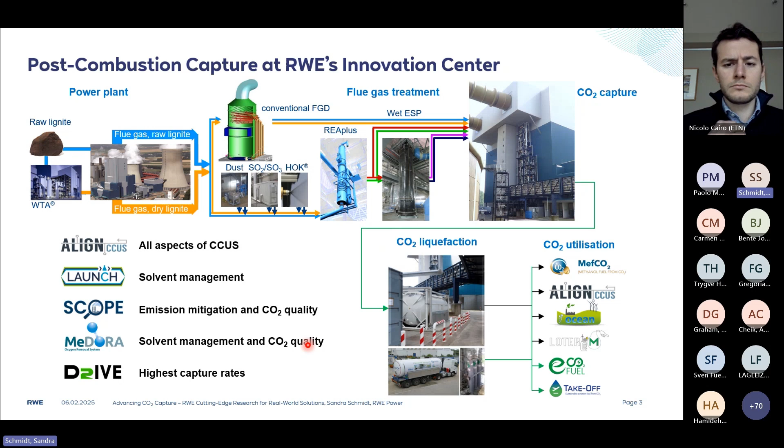The CO2 scrubbing pilot plant in Niederaussem is designed as an all-rounder. This means that it can deal with both fast and very slow reacting solvents, which can have a high or a low CO2 load capacity, and which can behave very differently regarding emissions and degradation behavior. Various process steps can be bypassed so that an optimized operation mode can be configured for several boundary conditions.

With a CO2 production capacity of 7.2 tons of CO2 per day at 90% capture rate, the plant is large enough to deliver suitable process data for simulations or scale-ups to large plants. And at the same time, it is small enough to avoid needless high costs for operating and equipment. The process is equipped with online measurement technology to evaluate the process performance, but also to test the measurement technology itself.

The parts of the plant marked in green are the emission reduction technologies, like the FGD, so the flue gas desulfurization unit with a wet electrostatic precipitator, the aerosol test module, the flue gas conditioning system, the dry bed here in the absorber, the water wash section, and the acid wash section. This all is used for emission reduction tests.

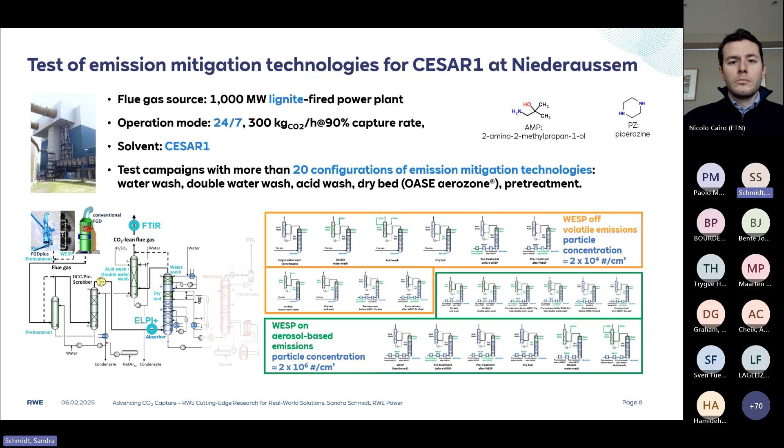For CESAR1, a simple water wash is not sufficient to achieve the desired low emission values. Nevertheless, tests with only the water wash are important to investigate the effects of process parameters on the emissions, such as the capture rate or the flue gas composition.

Emissions actually fall at lower CO2 levels, which is due to the temperature effects in the absorber. When less CO2 is available, less reaction heat is released, which lowers the temperature in the absorber, and in this way, it lowers the emissions.

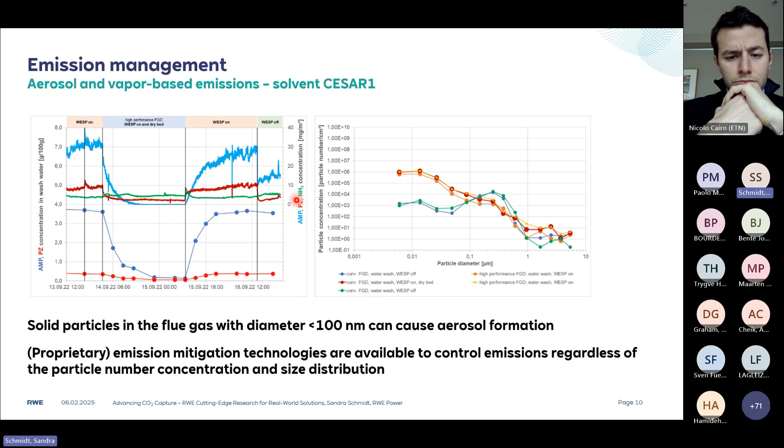Depending on the application, the dynamic or start-stop behavior of the CO2 capture process in interaction with the flue gas source is important. This applies not only to the CO2 capture rate and the heat demand, but also to the emissions. To date, it has not been possible to simulate such processes with sufficient accuracy. Real data from pilot plant tests, therefore, are the best basis for predicting plant behavior for industrial applications.

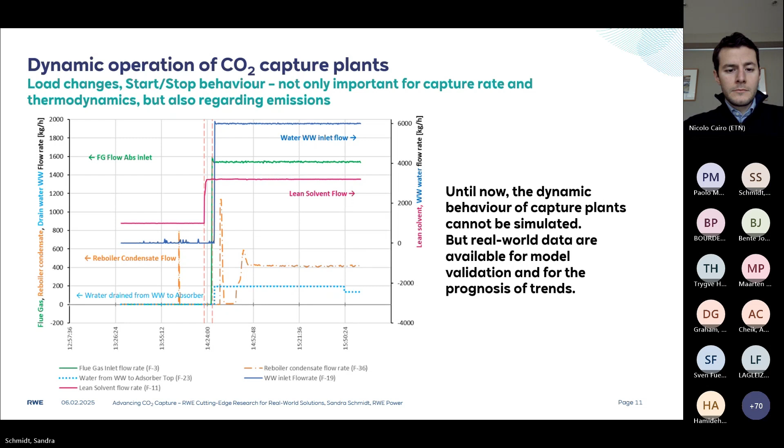As can be seen here from the operation data of the CO2 capture plant in Niederaussem, the operating parameters stabilize within a few minutes. The results and experience gained from the 15 years of operation of the CO2 capture plant at the Innovation Center in Niederaussem are being used. They will flow directly into the CO2 capture project currently being developed by RWE Power at the Knappsacker Hügel.

An optimized solvent and process technology will be used at the Knappsacker Hügel, which offers clear advantages based on the experience gained in Niederaussem. Optimized processes with a stable and highly efficient solvent have the advantages that less steam is required to regenerate the solvent, and that waste streams and emissions are significantly reduced. In addition, the optimized emission reduction technology is used so that a maximum reduction of emissions can be achieved with minimum effort. We plan to submit the permitting documents for this plant in about a year.

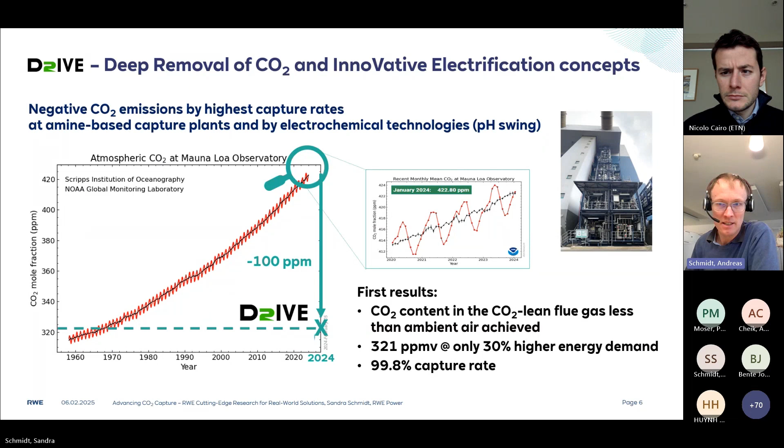TNO. And regarding the gradient that you need to push the oxygen out of the solvent, you will have the sweep gas. So this could be nitrogen or even CO2. And then perhaps a light vacuum will be tested, so a little bit of under pressure. What's the optimum? We will find out. So there are 18 months of testing planned for the technology. And as Sandra has pointed out, we need long-term testing.

CESAR1 is a low degrading solvent. It mimics, we think, also the modern world of new commercial solvents. And then you need time to find out what the effects are. And in the laboratory, you see the numbers. This was reached with this setup. And we will do it with 100% of the solvent flow in the pilot plant. But this equipment is still in construction, so not implemented in the process until now.

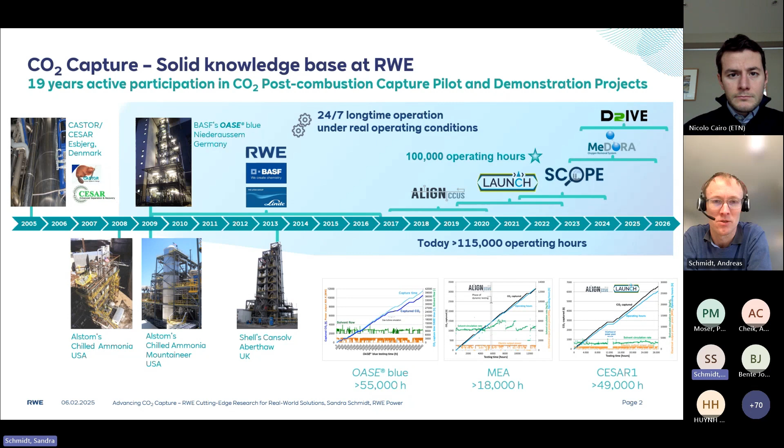So the project works with under pressure, not with over pressure. That is very interesting. Yeah, under pressure on the gas side, in the membrane. So you have the normal pressure of the solvent from the outside, and then under pressure in the sweep gas. Yeah.

Very cool. It might be mid-year that it will be presented at the Trondheim conference, if you're interested. Because it's not just tested at RWE, it will also be tested at a waste-to-energy plant in the Netherlands, from HVC, and there we will find out what we will achieve. Yeah. Also the aging of this membrane when it comes to one year of operation and so on. Yeah, very interesting.

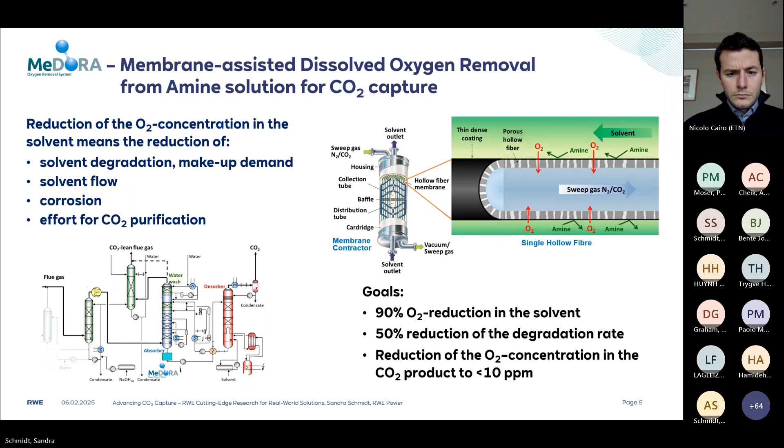So the reason why the lower CO2 content means lower emissions is that the temperature in the absorber is lower because there's less reaction in the absorber. It is an exothermic reaction, the CO2 with the solvent, which means that the temperature increases in the absorber from above 40 degrees Celsius to above 75 degrees Celsius in normal operation with 15%. And this is much lower if you only have 5% CO2 in the same absorber.

And this means that you have lower vapor-driven emissions. Nevertheless, you have a higher oxygen content. Peter, I don't know the results. What is the effect of the higher oxygen content on the degradation products and on the ammonia concentration? I think we have operated around 6 weeks, so really a step-like function, and we have not really seen a big effect. You see it here in the green line. The ammonia doesn't increase.

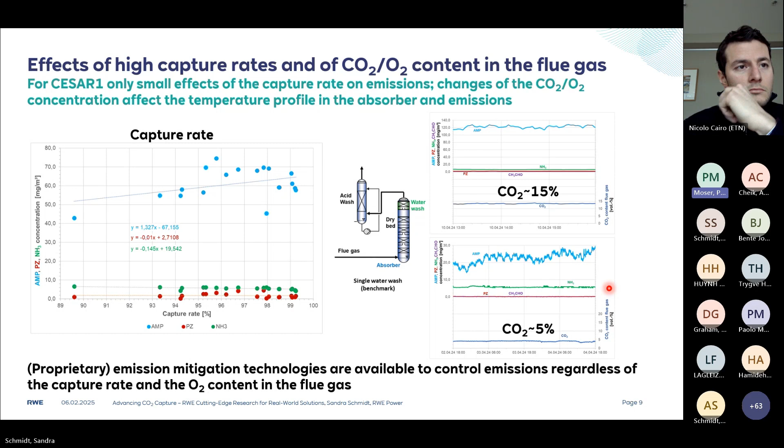It's very low. But to be honest, the discussion today is another one: it's more about amines being emitted and reacting with nitrogen oxides in the atmosphere. In the SCOPE project, detailed models on atmospheric chemistry have been used to analyze the emissions and what reaches the ground, even under worst case scenarios, running all the time, all amines reacting with NO2 and all forming a very dangerous nitrosamine, which is not so true.

But even if you estimate all this, you can say the ground concentrations are lower than the limits defined at the moment. So from our point of view, it is really environmentally benign.

Thank you for your responses. There's an additional question from Christophe. Please. Yeah, thank you for the presentation. I have two questions about CESAR1. The first one is about nitrosamines as well: do you have any NOx abatement as a pretreatment before the capture unit? And my second question is regarding the degradation rate of CESAR1. What were the best operating conditions or best approach to keep the degradation rate as low as possible? Thanks.

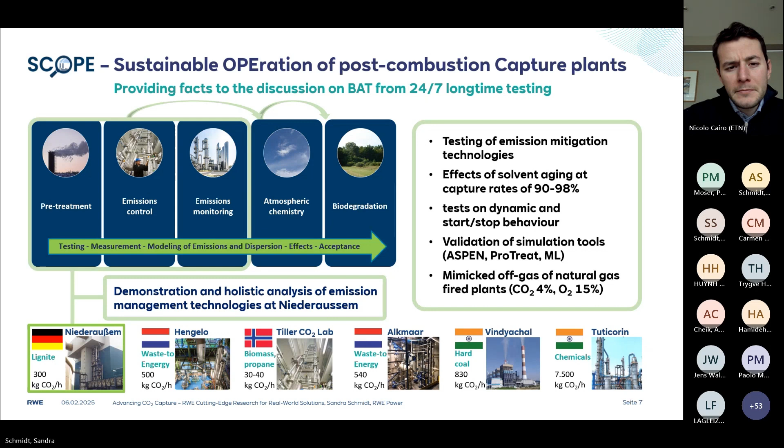It depends on what should be done with the CO2. So, if you have the connection to a CO2 pipeline, then you need the conditions of the pipeline. In this project, which we are developing at the Knappsacker Hügel near Cologne at the moment, we will transport the CO2 liquefied by wagons. And this means that it will be cooled and pressurized to about minus 25 degrees Celsius and 20 bars.

But there are at the moment discussions with the wagon suppliers and also with the intermediate storage sites at the coast, and also with the transportation via ship. So you have CO2 ships with different CO2 conditions: low pressure, medium pressure, and high pressure ships. We are at the moment developing the project for a low pressure transport line, but this means that you have to increase the pressure at the storage site at the inlet. And maybe if you calculate the whole way, it's better to increase the pressure and transport with medium or high pressure vessels. But this is in calculation.